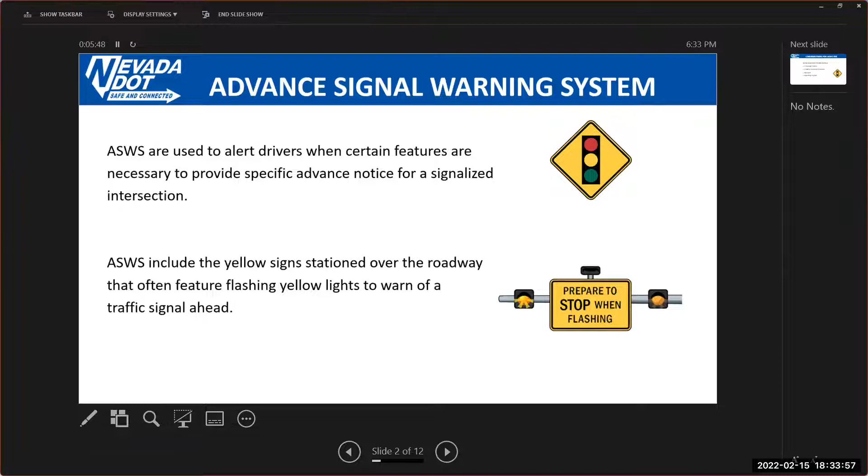The third, which is usually very common but most people don't see, is the one on top over there, which has a kite symbol with the red, gold, and green sign on it. Most people drive past this without paying attention, but these we refer to as static systems, and they are also deployed at certain specific areas. Now, to the point of why do we install advanced signal warning systems?

One of the key points is that when you are in a curve or an elevation such that you do not see the signal lights ahead, that's when we use the advanced signal warning system to help you know there's a signal ahead. Another case is when you are driving and haven't come across signals in a long time, we use them to let you know there's a signal ahead. When driving on a high-speed corridor, in combination with the two above, we also use that to remind you there's a signal ahead, or that around the corner in the curve, after a few hundred feet, you are going to see a signal. So we use those to keep you going.

The final and most important factor is engineering judgment. Just like a doctor without a license cannot practice, the same applies to engineers. We need to be certified to practice. So in addition to the three factors above, we need a certified engineer to compare all the data in the field and determine whether we need an advanced signal warning system, and if so, which type.

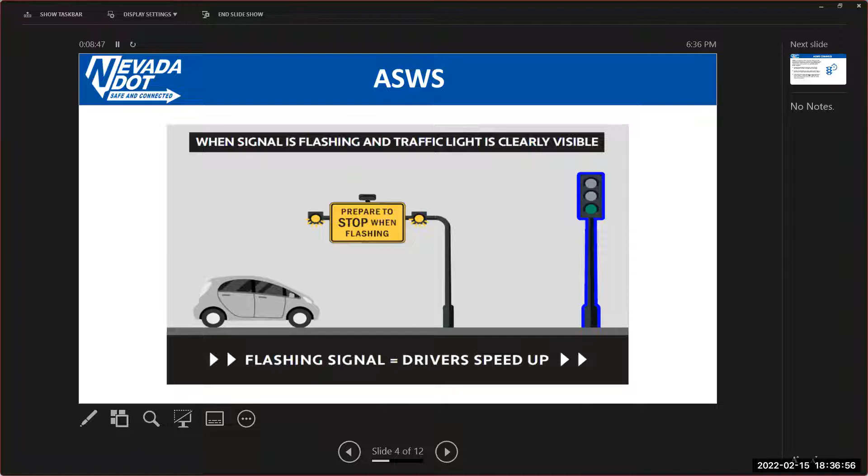This is a typical case where if we install an advanced signal warning system at the wrong place, we see drivers doing the opposite of what we expect. When drivers can see the signal after using the road for a while, they become very familiar with the infrastructure and know that when the advanced signal warning system starts flashing, they have a certain number of seconds to get across the signal. We've seen from data that a lot of them hit the gas, intending to cross before the red catches them, and they do it. But we don't realize that those few seconds of acceleration are a recipe for disaster, creating dangerous situations. As certified engineers, we've realized this creates a very dangerous time bomb at these locations, and we are trying to correct everything that needs to be corrected.

As I mentioned, when we set out with the research, we had over a year of studies, including interviews, and came up with guidelines. The first thing we needed to do was apply those guidelines to our existing systems. So we went across the state to all the signals that had advanced signal warning systems preceding them and applied our guidelines. We collected field data, came back together with the city engineers, looked at each one, and determined the kind of system needed. That gave birth to the changes we are seeing on our roads. Some systems we realized needed to be completely removed, some needed to be modified from active to passive, some needed to be changed to static, and some needed to be maintained. These determinations are based on the current and most advanced engineering knowledge available to us as a nation.

We have done all these changes in Carson, Douglas, and Las Vegas with great success, and we're very happy with the results. We realized that after deploying all our modifications, we have not had any incidents. This tells us our desire to correct unsafe driving behavior is working. I know everybody on the call today is a good driver who doesn't speed up when they see the signals, but for the rest of drivers, we want to make sure everybody does the right thing, prevent crashes, and promote safety. We achieved successful results when we deployed these changes in Carson, Douglas, Las Vegas, and Elko. The only portion left is Washoe County, including the Mount Rose Corridor, Pyramid Corridor, Veterans Parkway, and US 395 south of Reno. We are going to do those come late spring into early summer to conclude what we've started across the whole state.

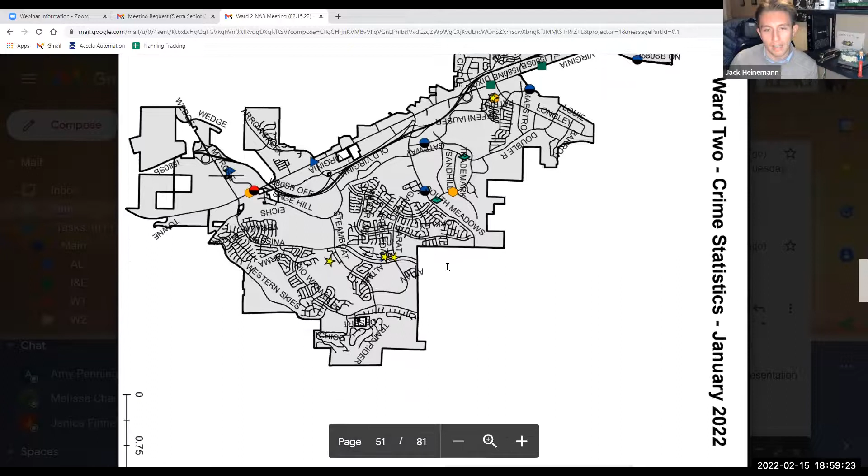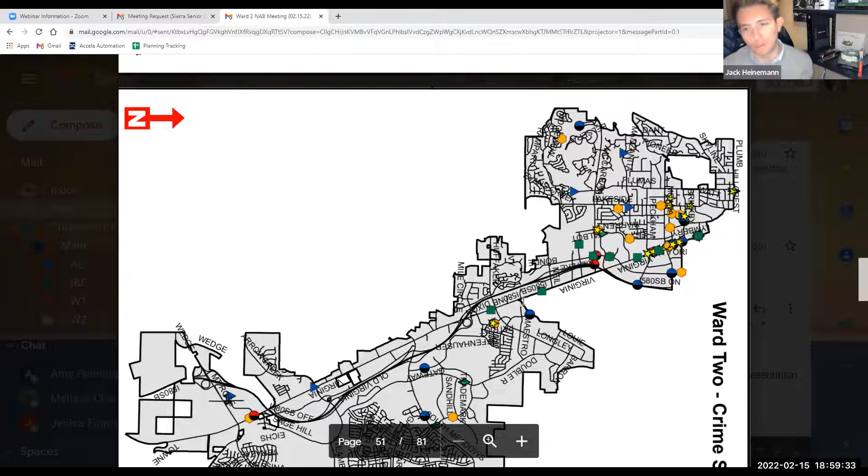And then the second question was just the commercial burglaries. I know there's no police representative here, but maybe next time they can come and answer these questions. I noticed there was a 100% increase in Ward 2, and almost in all the wards in the January area. And in the last report - November, December - there was also an increase specifically in Ward 2, I think 50%. So I'm just wondering why commercial burglaries are kind of up right now. That was the only question I had.

So Jack, just to chime in, I think that was a really good question about the wards, and it looks like they may not have updated it yet. So good question, and I will make sure to flag that.

Donna, did you have your hand up? I did have my hand up because I had noticed that the ward boundaries were the old boundaries, but then Jack brought it up and it confirmed, so I took my hand down.

The one thing I do know - where Julia and I live over there on Huffaker by South Virginia Street, kind of West Huffaker - I noticed that we're hearing more gunshots. Do you agree with that, Julia? I don't know about you guys that are a little bit more south than we are, but we're hearing quite a bit more. I think a lot of them are happening on the east side of Huffaker. And then, I don't know if they're going on Virginia Street, but it used to be occasionally, now it's several times a week that we're hearing the gunshots.

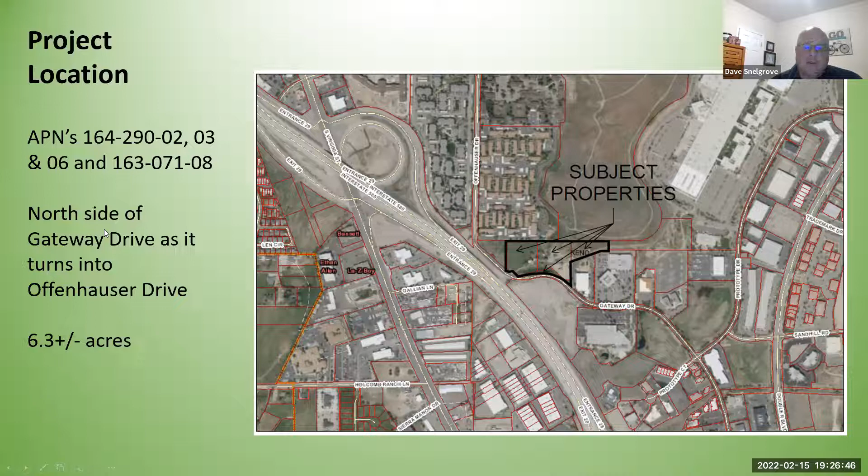So project location, this is, there's 4 associated parcels. There's 3 on the north side here. It's 164-290-02, 03, and 06. And then there's another one in another book and page, which is 163-071-08. It's on the north side of Gateway Drive as it turns into Offenhauser Drive, and 6.3 total acres in size.

The surrounding uses adjacent to the property: we've got apartments up to the north and west. I-580 is down toward the south. There's some vacant land, which I've heard some rumor that there may end up being a mini storage that goes there. We've got office uses over to the east of us. We've got Huffaker Park up to the north, the trail system, and we will have a connection to the trail system that comes out of the townhouse project. There's a daycare center, I believe it's a Blue Kangaroo, directly adjacent to us on the east. And then there is the South Reno Athletic Club Fitness Center, just down the road a little ways, so in convenient proximity for future residents.

The master plan and zoning on the property: the master plan has suburban mixed use on the north 3 parcels, and then there's planned development on the south end. The south end's kind of a remainder piece after Gateway Drive was put through with the appropriate radii. It kind of cut off this really odd, technically unbuildable sliver, but that is part of the property too, and that gives us the frontage along Gateway Drive.

Insofar as the zoning, the SMU translates over to MF30 zoning, which is 30 dwelling units per acre, allowed if that's your maximum. That property is just a touch under 6 acres. And then we have the PD parcel in the south, that's just a little over 3/10 of an acre. The allowance on that, if we just look at the MF30 zoning, because the PD is more in an office industrial area, we don't have any uses that'll go over onto that property. It would allow up to 179 units on the property.

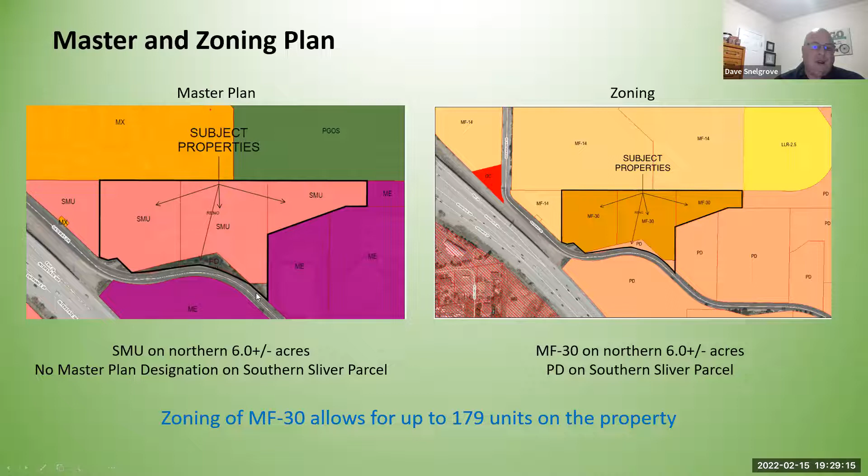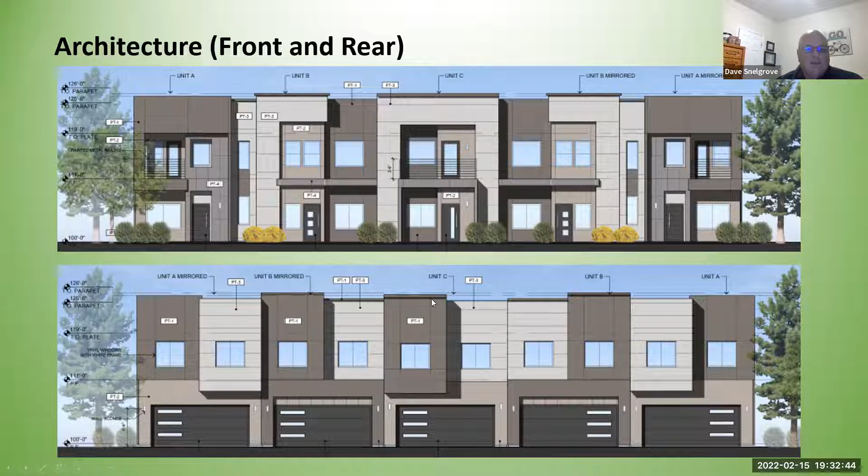So these are elevations of the front and rear. You can see the garage doors on one side and then the front doors of the units on the other. They're all 2-story units. I just heard from the architect today, I think we're at 26 feet that we show here. I think we're going up to the highest at 27 feet, and that's some of these middle pop-up areas that will go up to 27 feet. There's some half-foot steps along the building to give some articulation.

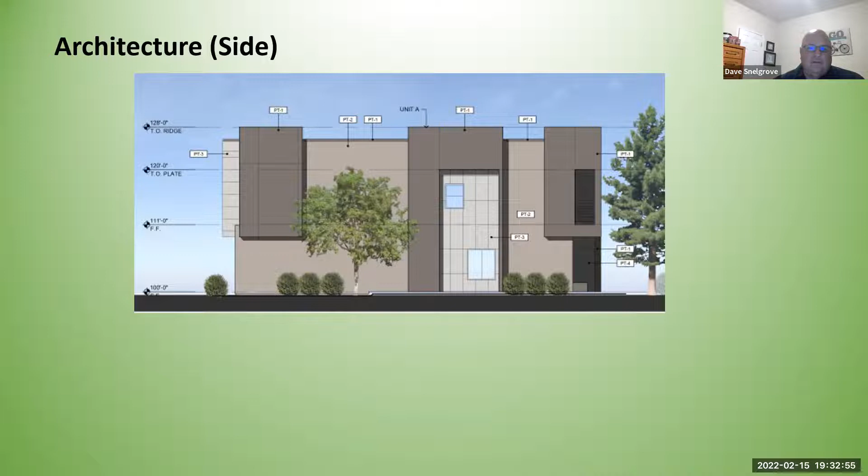This is the side of a building. There's not a lot of windows on the sides. It's more oriented front and rear where you have the windows. I mentioned earlier, this has an architectural consistency to the buildings around it.

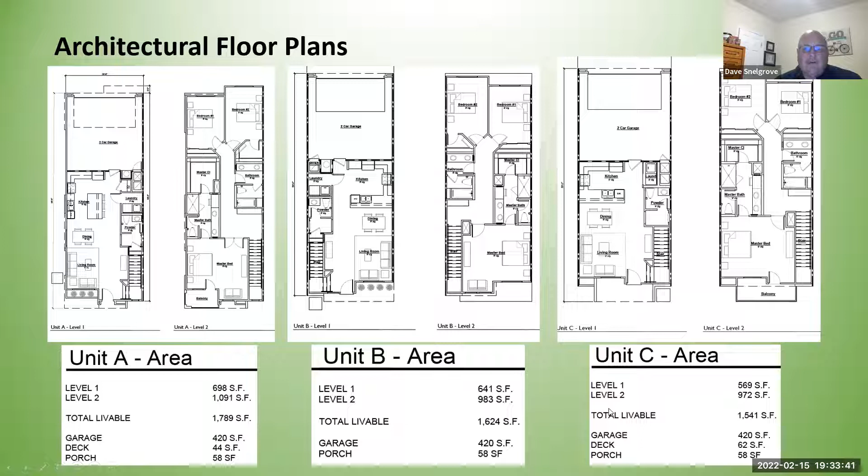We did run a tree study. We did meet out on the site with Councilwoman Duerr. We know that trees are a hot topic and definitely currently a hot topic, and we wanted to make sure we were trying to address this proactively.

Other trees on the site include some pear, apricot, and apple, and then other trees like red cedar, juniper, silverleaf poplar, and one I'm not even going to try to pronounce. And then we have the Austrian pines along the frontage.

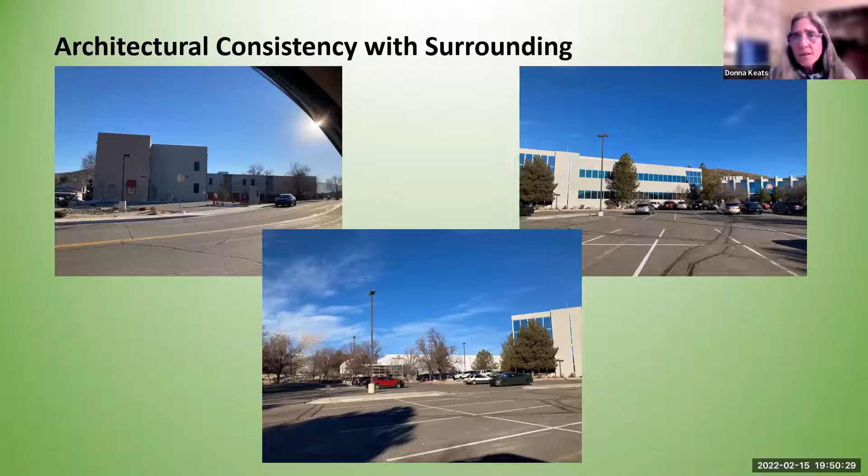I have one other thing, I think it's in the preceding or the next slide. Okay, let me close that. There we go. It's actually a picture, I think of something adjacent, maybe a long linear structure that looks like a drainage, trending east-west, and it butts up into what's been built over and compacted. Was it a picture? I think, yeah, it was a picture.

Keep going. Okay, I think that was my last picture there. Is it something that was on the site, Donna? That's what I wanted to ask you about. I couldn't tell, it's a geographic feature, not huge, looks like it trends east-west.

If I could jump in, I think she's talking about the canal, kind of a drainage area that I asked you about as well, maybe. Oh yeah, the drainage that comes across—unfortunately I don't have that plan in here, but there is a drainage that comes across the site, kind of like this.

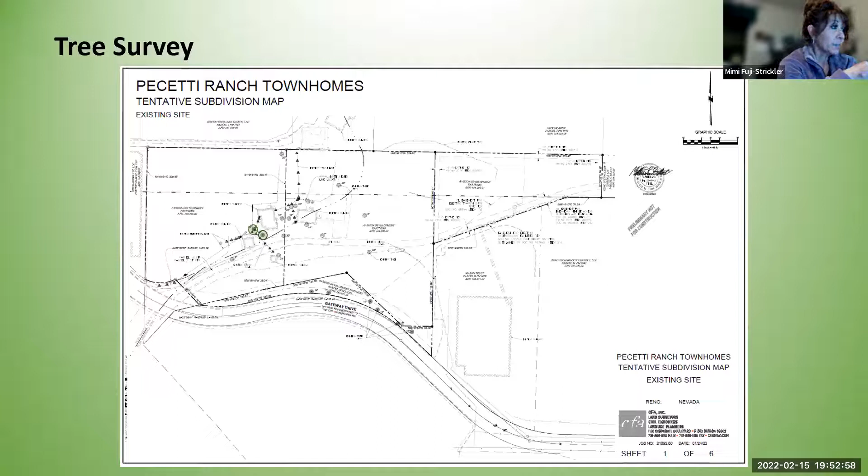Dave, I do have a question. I used to drive that when our flood project was located over there on Gateway, right behind that property. I drove Gateway every day for years. And when you're heading east on Gateway, towards the old flood project building, that corner can be blind.

Yeah, and that's really why we wanted to get the access point out to a better point. We fortunately had the outside of a curve where we could get on, where visibility would be good in either direction. And I know cars don't always go the speed limit, so we wanted to make it as safe a vehicular access as we possibly could.

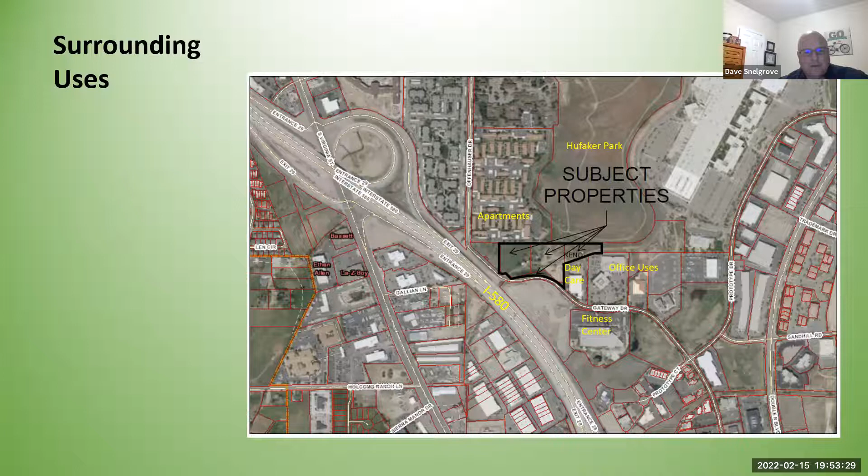Do they really plan on putting—I see on the site adjustment plan and the other plan that they've got all these trees planned for right there on the edge of the property. Are those trees?

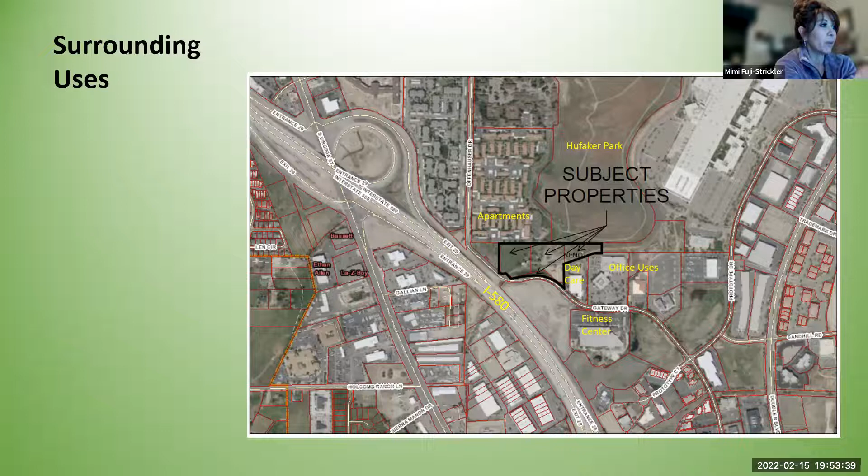It's right along here, and we had LA Studio Nevada prepare this, and I think that this meets the street tree requirement. As I mentioned before, there were 16 evergreens, and I know the South Meadows PUD really put a much heavier emphasis on evergreens.

They wanted more evergreens planted, and looking at the old aerial map, it looked like there were probably 15 or 16 Austrian pines planted along here. These would end up being deciduous trees, higher, so you'd still have visibility below for vehicular access and vision triangles. We'd make sure that when planting along the entry exit area we have clear visibility, and where we've situated the access, we're going to have as good visibility as we could have on this property.

But given the bends in the road, this is a really weird little spot that when it snows, for some reason, the snow does not melt on this section of Gateway. Oh, really? It's very, very bizarre. I've noticed that every year when it snows and you're driving, and Mara's shaking her head yes.

When you're driving on that curved part, it does not melt. It's very, very slick. So the reason I'm asking is, with all of these trees, how far are they going to be set back from the road? It's a blind corner, and it can be very slick. Now we've got trees, and we're increasing the traffic.

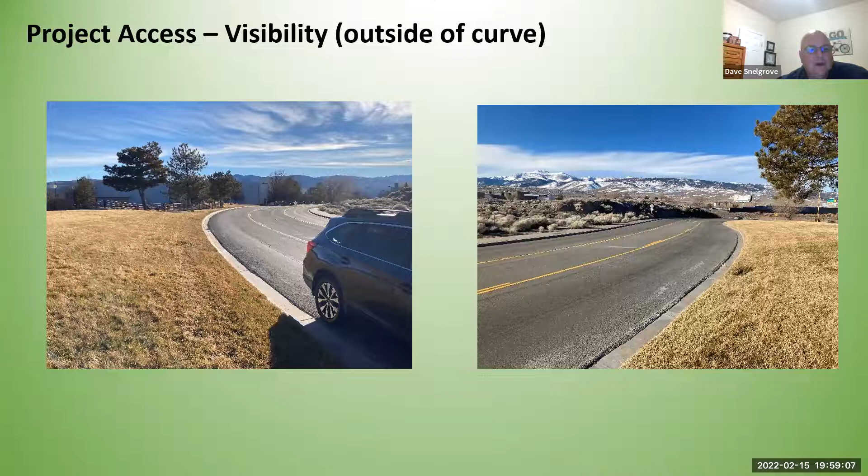There is a mound here, and there was a slope easement. I have a feeling that was put in when the PUD was originally developed and the road was created to protect the homes back there, the couple of ranch houses, from noise. That mounding can remain and we can get the trees a little bit farther back, as noted in this slide. All along here in the front we've got a lot of room to move them back. Here we've got something coming a little closer, and here too, but we do have ample space to not put those right up by the edge, so we can get them shifted back a little bit. With the mounding that's there, that creates other gravity factors that may make it a safer landing if someone does get themselves out of control.

Another thing I was going to mention is responding to Julia Hammett's and I think Donna's comment about community, green space, and gathering space. You may want to, if you're moving buildings around, wherever you end up with your open space, consider a community garden or something circular, a gathering spot. It doesn't have to be right up by the road, maybe it's where you're moving the buildings back into the community. Maybe there's a fire pit or something with some benches, something round where people could gather.

I don't see a children's play area here. I don't know if there are going to be children. There will probably be some. It would not be age restricted, so we would have some children here, and I'd imagine we'll probably have some type of play area as part of the open space areas out in the front.

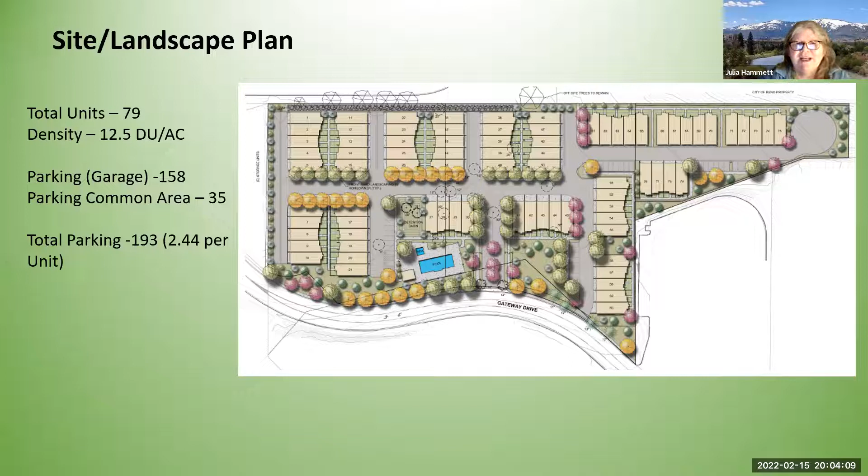Okay, back to the green area—Council Member Dewar brought this up too—I'm looking at that little patch of green to the right of the pool, and I remember you said there's a drainage that runs through it. Another thing we locals who drive that road a lot know is that especially in winter, ducks and geese jam into every puddle in the fields around there. There's a little drainage right next to the fitness club, and sometimes I've seen as many as 50 ducks jammed in there at once. It would be very cool to use what you already have going on there to create some sort of small pond or pool with benches around it, maybe a fire pit, some community area. You'd have waterfowl that already hang out there, coming in more in winter, and it'd be a nice area instead of hiding it under a pipe. Why not embrace the drainage? I don't know anything about what I'm talking about, though.

Yeah, part of it becomes a challenge. If that's our detention area—let's say the pool goes away and we make that area larger than what we have shown now, which means we don't have to make it as deep and we can slope the sides differently—if we have that area intermingling the pass-through water with the water generated from the site, that can be a challenge. If you get a big runoff event, you might find out you don't have enough capacity that you thought you had from your own site. I know the engineers are a lot smarter than I am and can probably figure those numbers out, but yeah, that's where you run into a bit of a challenge intermingling those two.

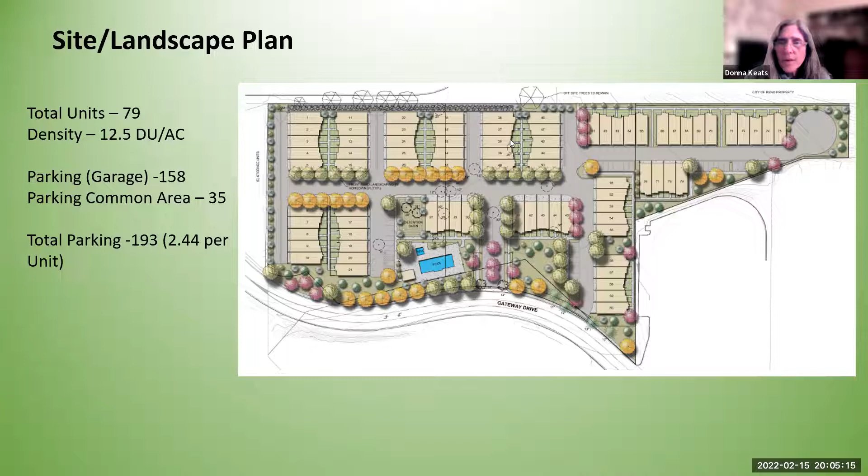The slide that shows what I was thinking of is your tree survey with all the colored dots on the trees—okay, that one. Yeah, and you've got that big linear line going from the north area. It's the drainage. Yeah, this is the drainage coming through, so it's here—the drainage comes up here and goes into a pipe. Yeah, it comes over here, I think it may get piped here. It's not open channel flowing because there's a driveway that comes up through here, but then it gets piped into this driveway. But isn't that where you're going to make your detention basin, to the left hand of the slide over there?

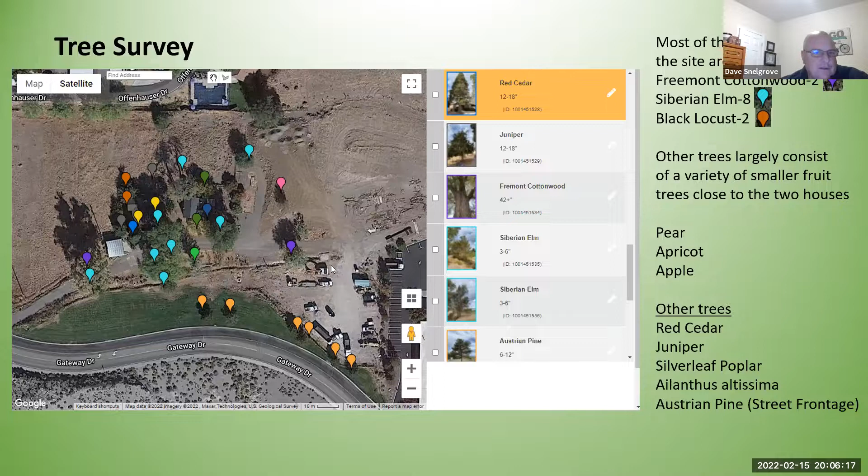The detention area—let's see, these two trees here, the red cedar and the juniper, are in the middle of the detention area right now. This area is going to become a detention area. We're going to pipe this and route it down along the southern end, then bring it up and get it back in between a couple buildings and back into this pipe. So in our site plan, it's going to go between these two buildings here. We had it running—we didn't have it running under the pool, we had it running out closer to the frontage of the property, then up between these two buildings, and then it would connect in with the pipe.

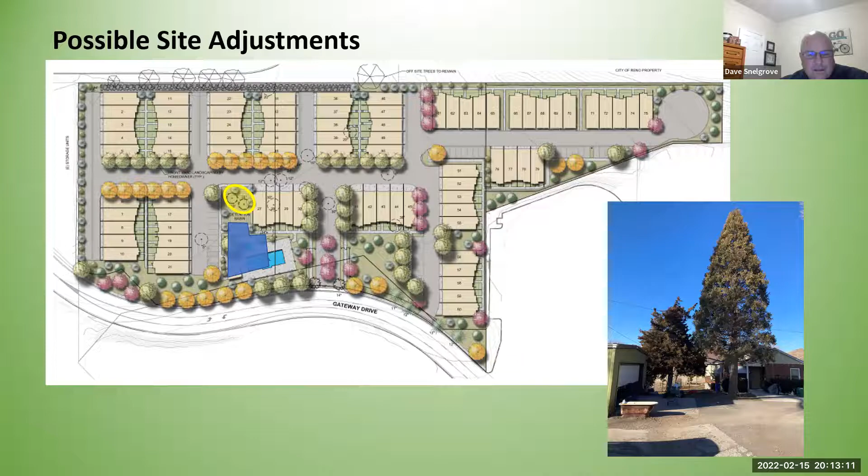Excellent. So all right, Dave, I thank you very much for the comments tonight. They were very good, and I do enjoy presenting in front of this board. So thank you and have a good night. You too, thank you so much.

Yes, well, thank you very much again. Have a great night. All right, thanks Dave. You too, bye-bye.

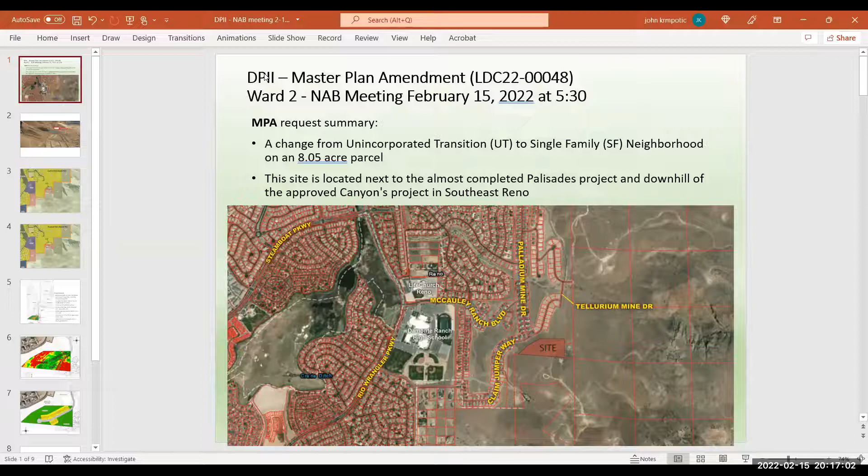This is a master plan amendment from unincorporated transition to single family neighborhood as an extension of the Lennar neighborhood, which we know now as Palisades. It's located next to the almost completed Lennar Palisades project, downhill of the approved Canyons project. We've also presented Canyons Edge to you, so you know where that is in relation to this.

Here's a different perspective. I think this shows a really good feel for the topography and the relationship to Lennar. It really is almost adjacent to it, just above it. This road right here is that dead end stub that points directly into the project.

So we wanted to give you a three-dimensional view of the site. There's the 8 acres, and the red boundary is about a third of the site. It's difficult to scale because we have that weird polygon in a 3D world, but that's the way it sits in that perspective.

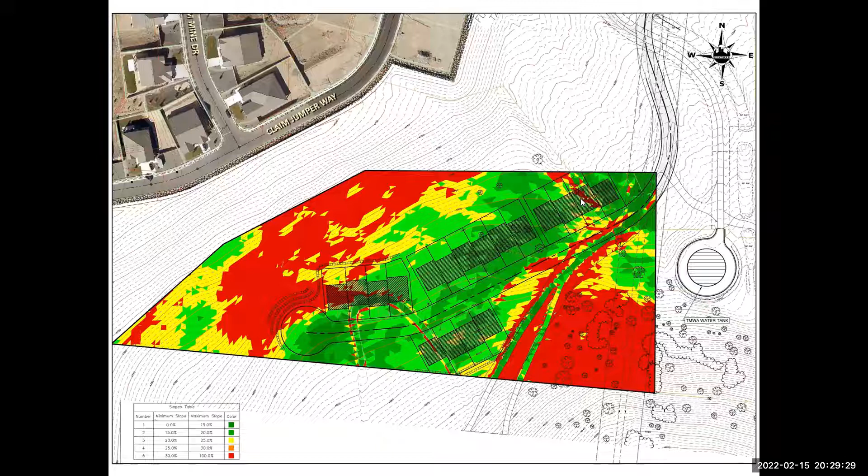Yeah, yes, that is graded. We've gone through the hillside ordinance. There's a tiny bit of red which will be graded, right? The code allows for that.

Okay, so I think she was asking where is the drainage going - like there's water coming there through now, that's what she's asking. Yeah, I think she's talking about this right here, it's cut off right there. You see that topo? And then it's wrapped around the Lennar project, just like they typically do with the small drainage feature. You either do a cutoff ditch or you reroute it with the grading of the site, and there it is. It's cut off a little bit.

Let's ask it this way, John - is there a pipe going underneath the house? How's the water getting from the uphill side of the project to the downhill side of the project? Is it being routed around, is that what you're saying? Yes, that's exactly right, it's routed around, adjacent to the high end of the project right here. That's what's going on. Okay, thank you.

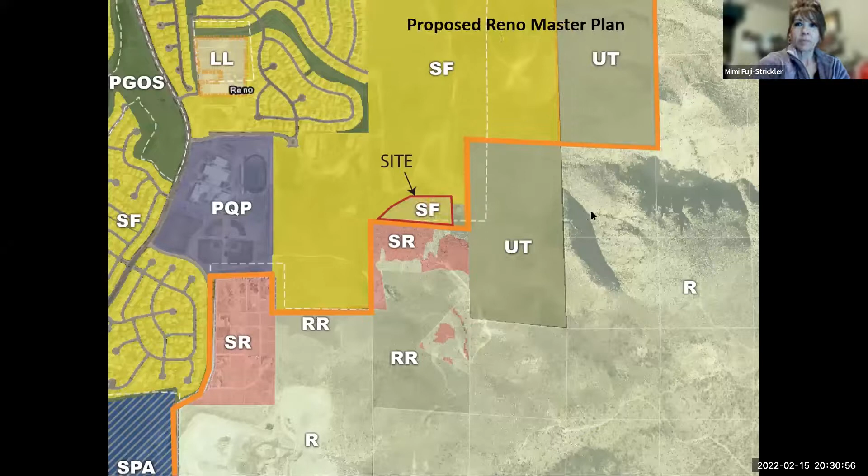Anybody else have questions this evening? Let's see, anything in the chat? Patrick, Julie, Tyler, nobody? I just have a question.

So with that last remaining piece, why is it that it didn't get incorporated at the same time as the other section into the master plan change? I was just wondering that - why this one was the last one. Why didn't it go as a bulk group or something? You mean with the canyons projects? Yeah, I know this one was - you guys just kind of systematically do one section at a time, or I was just wondering why. No, it's a good question. I think it was about timing of infrastructure. The families owned it, I understand, since 2005 or 2006.

John, can I add on to this? No, please go ahead, Jim. Yeah, hi Mimi, hi Jim. This is Dolan Properties too - our initial project was Dolan Properties, which is the current Palisades. When we did this project, there was 120 acres. We carved off this section at the time. It wasn't able to be serviced by the infrastructure planned by Palisades, mostly because the water tank you see on the right side of this picture, this TMWA water tank, wasn't in the pressure zone. So we carved this piece off for future development, which ended up being 15, 16 years later. But that's why the zoning was different at the time and not necessary then. But now, since infrastructure is there and we can access this with other facilities, now we're looking for the zoning change, if that answers your question.

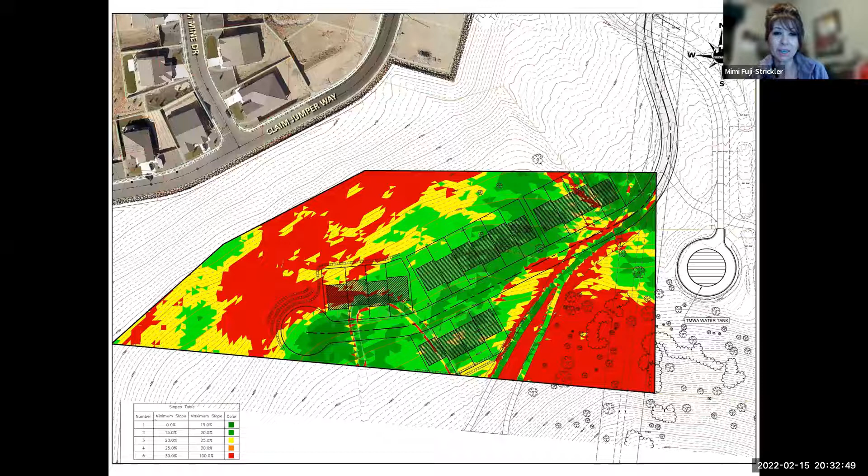Yeah, well, sometimes it just takes a little bit of time, but I'd also like to note on this project, it is a family project, with my Uncle Tom and Uncle Mike and my brothers, and we are obviously looking to have a project that makes sense with open space, plenty of it, like most of it does, and we have 18 units, which is what we need for this project to be economical, of 8.05 acres. I know the dynamics are different - the last project was 79 units on 6.3 acres. So we're doing this clustering concept to maximize the open space. And like Jen was saying, it's in the area as far as wildlife is concerned - it's already fenced off, so those issues are solved for here. But we think this is a good project, a lot of open space, and it makes sense as it connects to the Lennar project as it exists right now.

So let me ask, these are townhomes, Jim and John? Yes. So you did that so you could have zero lot lines, correct? Yeah, that's correct. Those are attached, with lot lines on one side, kind of clusters. Yeah, they're attached.

1 story or 2? 2, hillside adaptive architecture, so we're minimizing grading that way. They kind of fall down the hill with the topography. Makes sense, get it.

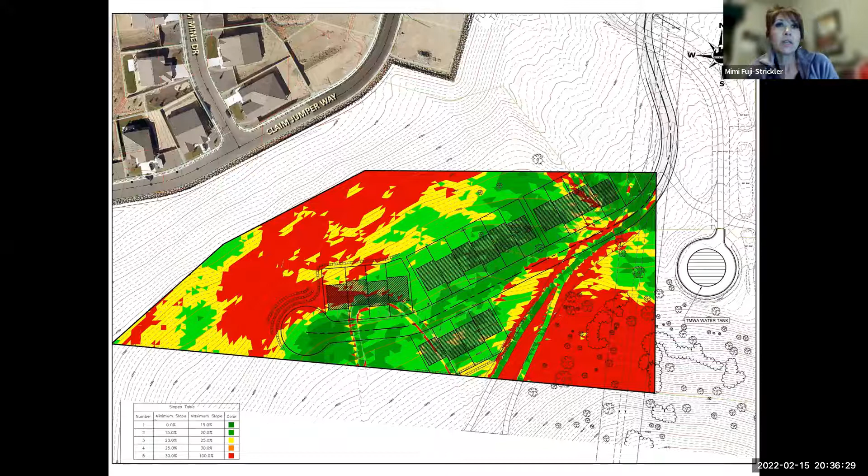Yeah, I was looking at the legend, because your slope table has between 30% and 100% in what's shown in red. I was just wondering, because that one was mostly primarily red underneath the footprint of the building.

The code allows for grading, and of course it's red for these reasons because of the way Mother Nature made it - there's whoop-de-doos, ups and downs, it's not all bands of green and yellow that go together. So we have something like that, and we got to deal with it.

What's that, John? I was just going to say, there is some cut generated, so we wouldn't be bringing any dirt in, but we would be filling some of that area in with the dirt generated from the lots on the south side. So they'll generate a little bit of material, and we'll put it on the low side - cut and fill balanced on site.

The rockery walls will blend in naturally. I think the Palisades has a couple of rockery walls that aren't shown on this plan. They also did the same thing, basically just trying to make up that steep part of the slope with a wall or two.

Okay, yeah, I'm just checking, most of it's pretty good. Just that last one seems to have the most slope on it. So thank you, Jim and John, for that explanation. Mara, you've got your hand up.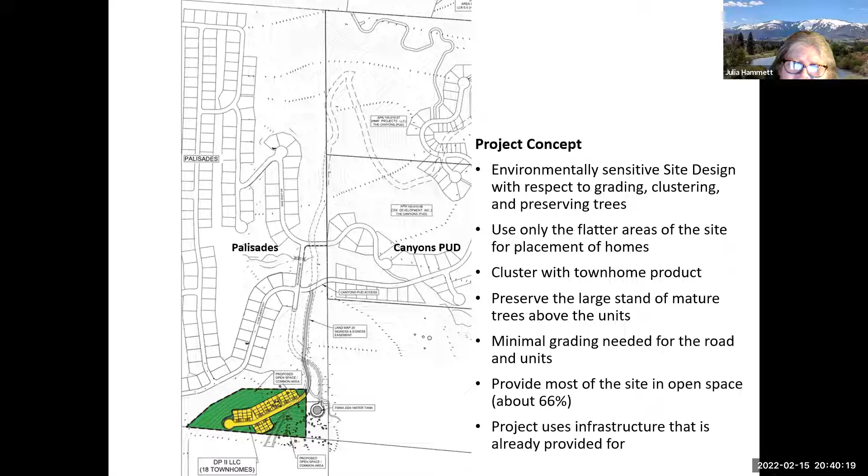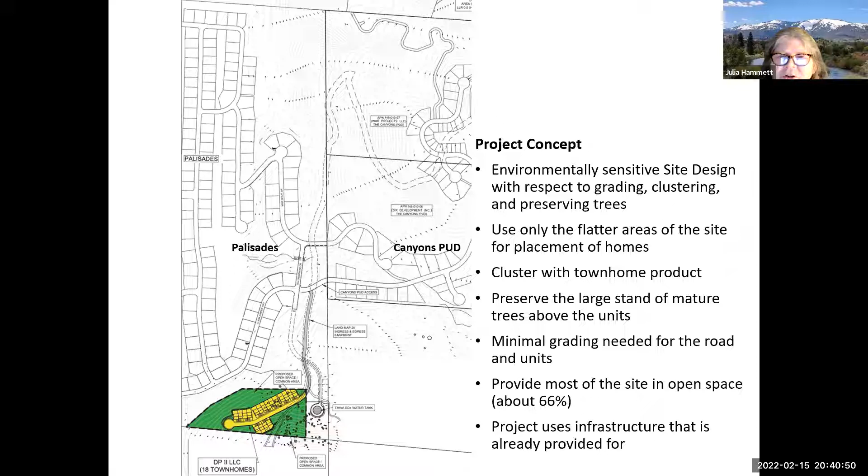Yeah, you look at response time. John, do you remember what our response time was in meeting with the fire captain? There was sprinklers, and then typical defensible space kind of fuel management, right? That's what we talked about in preparing for this. Do you remember any more? Buffer, and you're doing sprinklers in the units. That's correct.

This is all driven by the WUI designation, right? Wildland Urban Interface, and its designation on this particular property. So we have that set of standards, some of it's a menu, but the fire department is pretty aggressive in my experience in making sure that's done properly. Oh, they absolutely do their best, but in those fires, they do their best too. They can move really fast, and you're out there right on the edge.

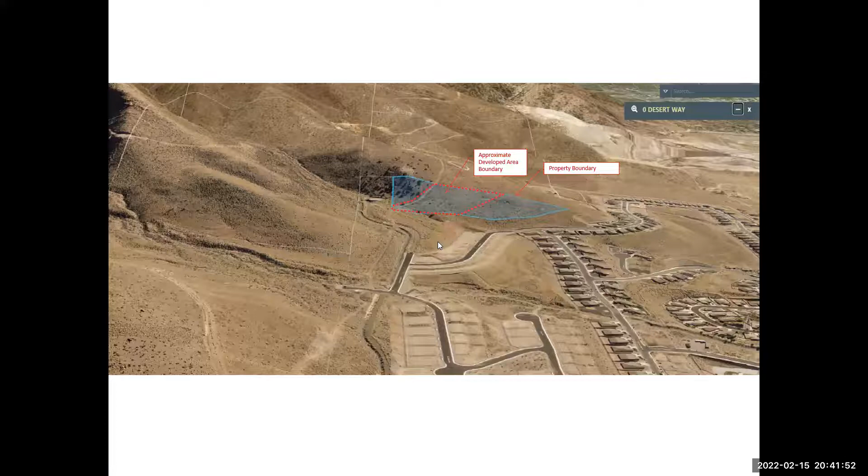It said the distance to the fire station is 5 miles, but it doesn't say the response time. But the Reno Fire Department, they were satisfied that with the sprinklers they had adequate time to get there with the single point of access.

Are those utilities, is that TMWA and City of Reno sewer guys on this project? So I see existing TMWA water tanks, so the water is coming from TMWA. You guys are hooked up to the City of Reno sewer? Yeah, this is city sewer and TMWA water. A different tank, right? That tank happens to serve other properties, but you know about the pressure zones, there's not enough grade change to make pressures work there.

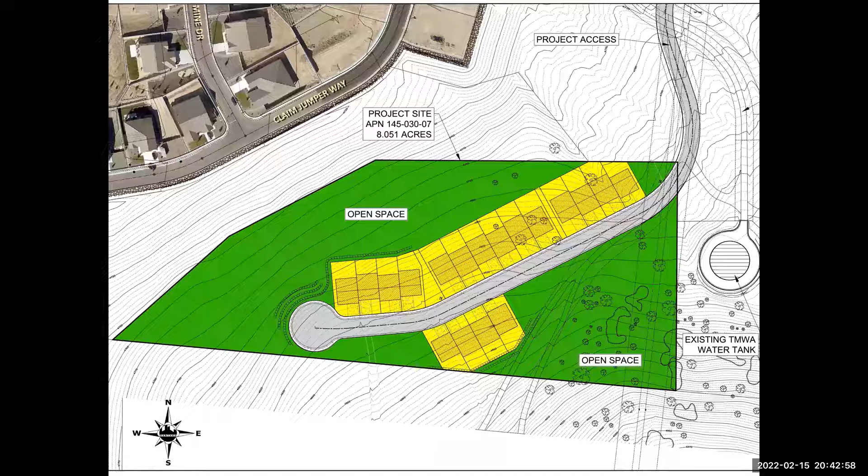And then, are these roads public roads? These roads are public roads. Did we confirm, John, if this is going to be dedication or private? Dedication of what, I'm sorry, I didn't hear the question. The roads? Yeah, it's public street. Yes, that's what I thought we were. I just wanted to confirm. Yeah, we were dedicating. Got it, I'm just wondering if they were public or private.

So everything, and the Palisades as well, is that all public as well leading up to this? That's all leading up to it is all public. Yes, all public, okay. So there's no private in any of the developments that are surrounding? No. Okay, it's all public street network.

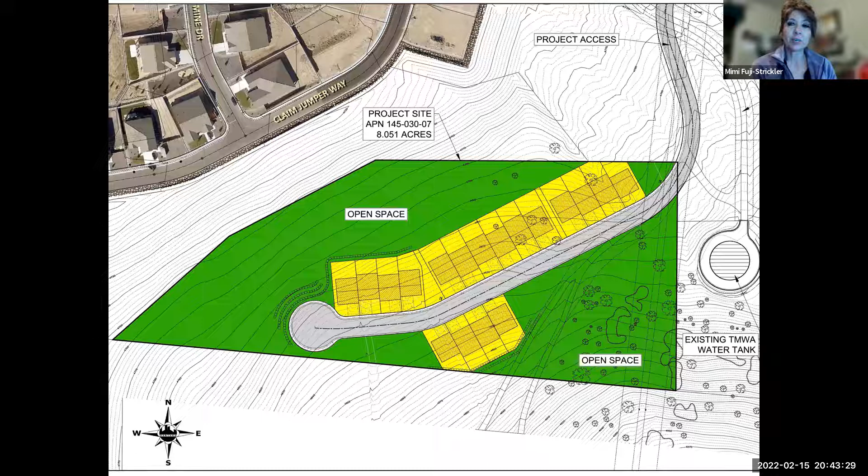Got it. Okay, does anybody else have any other questions, board members or any of our lovely citizens that are still hanging in here with us? Anyone else? Okay, Patrick, hello, welcome back, what's your question?

Is there an HOA or LMA proposed to manage the brush removal and any sort of landscaping, common area landscaping? Yeah, we're going to have one, right? Whenever you have common area, it pretty much guarantees driving an HOA, and that being one of the responsibilities of the HOA with an assessment to the units, that's how it typically works. Thank you.

Nick, do you see anybody else with comments? Yes, I'm seeing a hand now, Kyle would like to speak, so I'll promote now. Fantastic. Hello, Kyle.

Hi, I just wanted to chime in and remind the board that the request is for a master plan amendment, so I'd recommend trying to focus comments, especially to the Planning Commission, on what the request is. We don't have a tentative map or major site plan review request at this time for this project. I know John showed a lot of detail in the presentation, but I'm not sure the Planning Commission is going to get that same level of detail because it's just a master plan amendment at this point. They will have to come through with a tentative map and probably a major site plan review in the future to develop the end product. So I just wanted to throw that out there as a reminder, since I'm not really sure what the Planning Commission is going to see at this point.

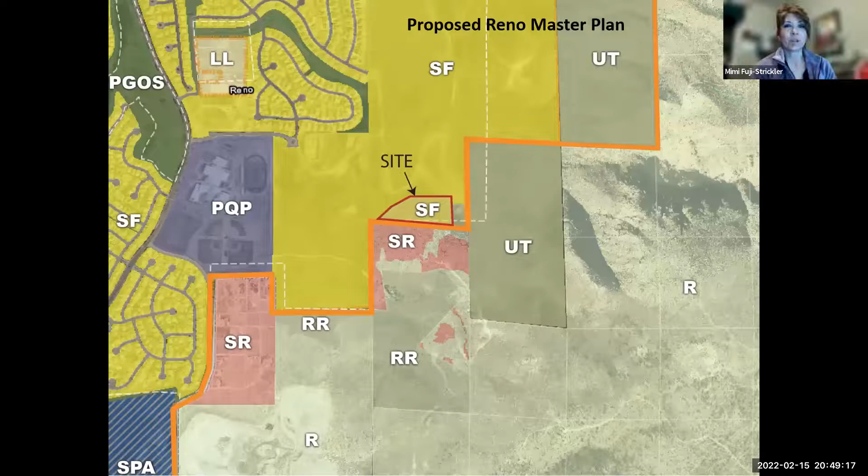Great job on the presentation, you guys. Great maps, we appreciate that. When you guys come back before us again, probably this summer, we're going to be informed and we're going to breeze through, move with the next phases. We really appreciate that so much. Of course, thank you for all your feedback and questions.

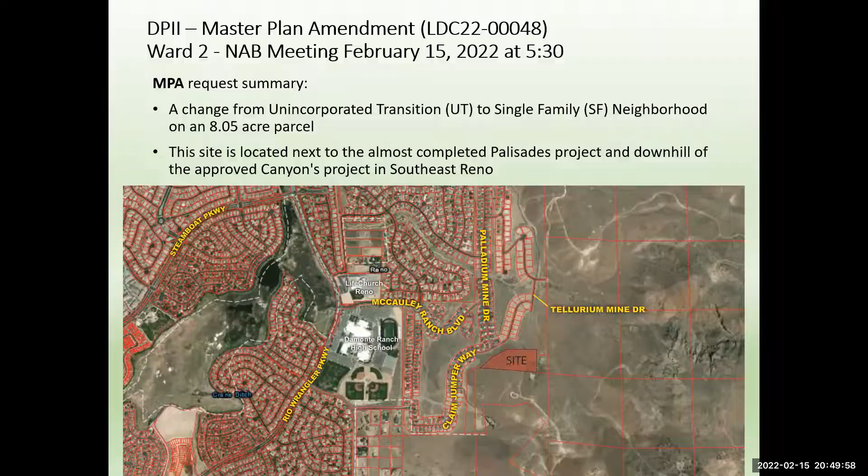Thank you this evening. We appreciate it so much, and your thoroughness and your explanation. We'll look forward to seeing you guys back for master plan, zoning, tentative map, all of the above. Thank you very much. All right, have a good night, you guys. Thank you. You know, I have one more question before you jump off, unless they already have.

Is that Mimi? When will you do the geoengineering, in terms of your earthquake review? I know there's earthquakes just on the property next to you, and I remember there was one right along the westernmost boundary of the Canyons project that probably lines up with this.

So it's just, we will do it at the tentative map stage. It's an actual requirement, that's when we'll actually have the geotech. Yeah, thank you.

I've talked to Mr. Dolan about that, and he's going to do design level geotech, knowing about some of the geotechnical issues in the area. It's important to know what you're up against, as opposed to what is called a preliminary geotech report. That's what we've talked about. It's a good idea. Thank you for the question. Good question, Councilman.